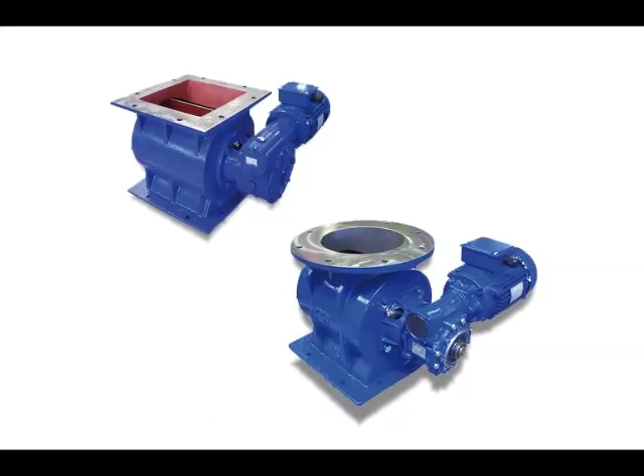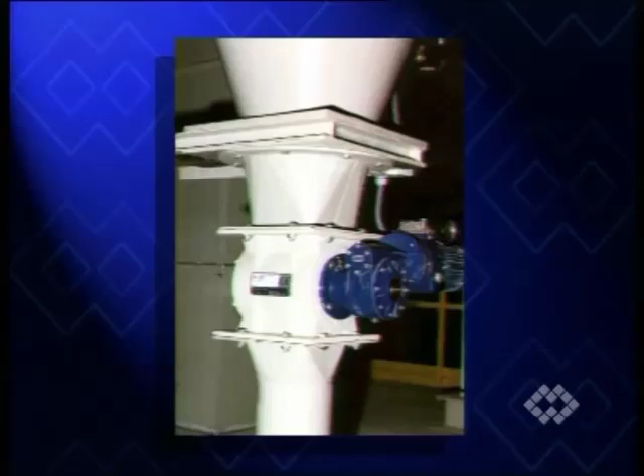Controlled feeding from or into silos and hoppers in a very confined space is required, rotary valves are the ideal solution. The sealing of negative pressure cyclone and dust filter outlets is the other classic application.

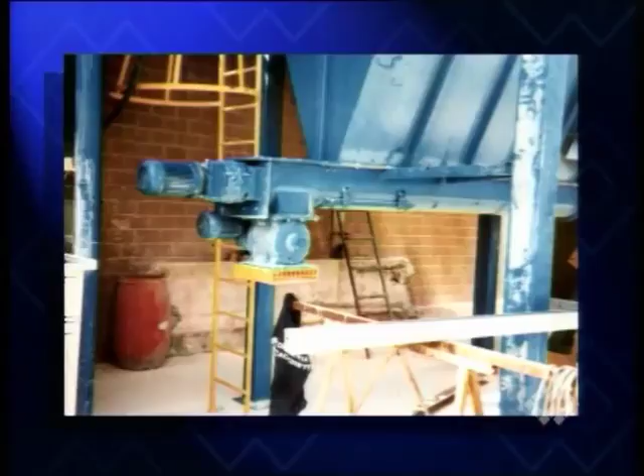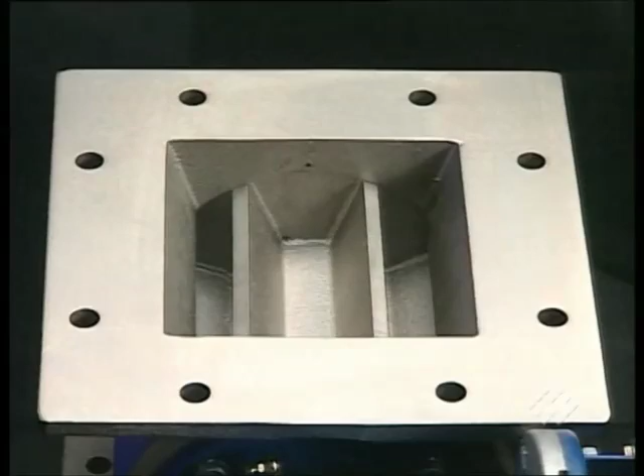Rotary valves consist of a tubular casing, a horizontally mounted rotor with a certain number of V-shaped cross-section compartments, a drive unit, and a casing cover opposite the drive end.

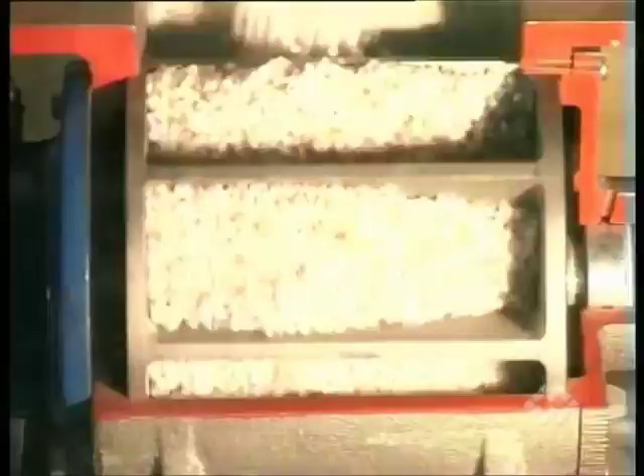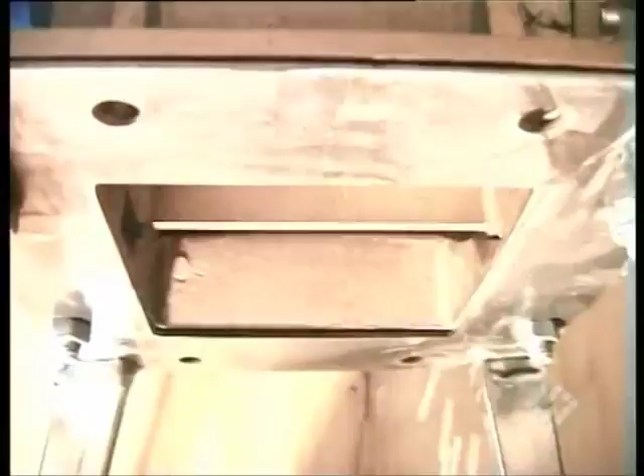Two compartments at a time of the continuously turning rotor are filled up with material through the infeed opening at the top of the rotary valve. After less than half a turn, the material falls through the outlet port with the same cross-section opposite the inlet.

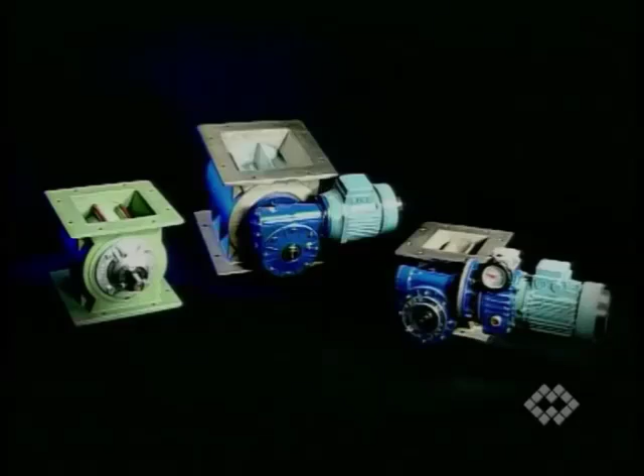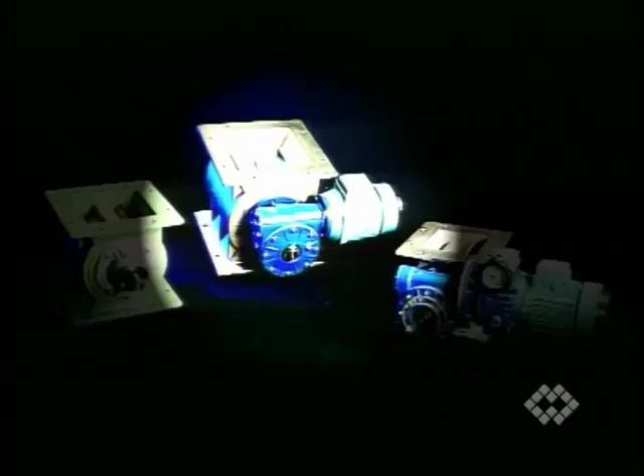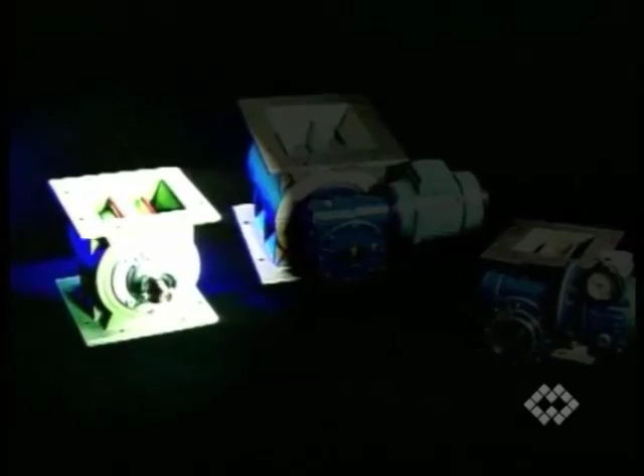Valves for corrosive products come with casings, covers and rotor made from chromium or nickel-plated cast iron. Additionally, versions with Teflon-coated contact parts and food-grade versions entirely made of stainless steel are available on request.

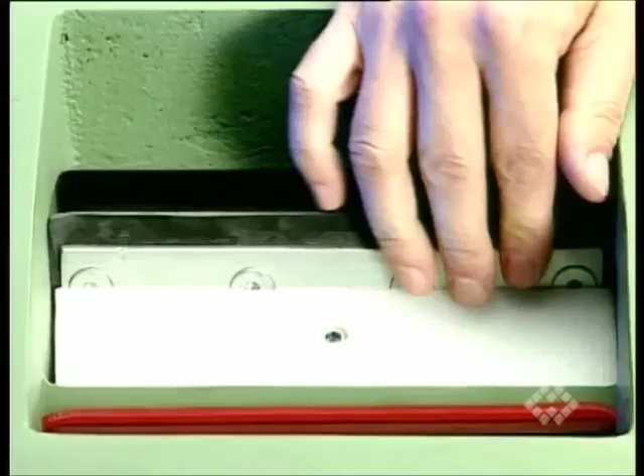According to the material handled, rotors can be equipped with removable synthetic inserts to reduce the feed rate or to handle particularly sticky materials, and with scrapers made from Vulkollan, Viton, Teflon or spring steel.

WAM Group members, Torex's rotary valve range meets every user's requirements. In the version with a standard rotor, they achieve the following feed rates.

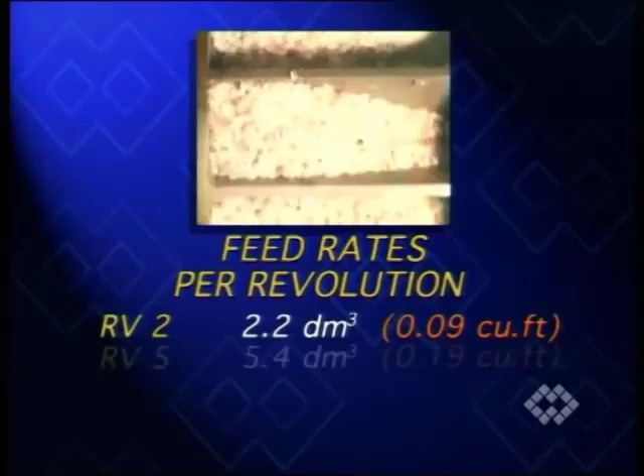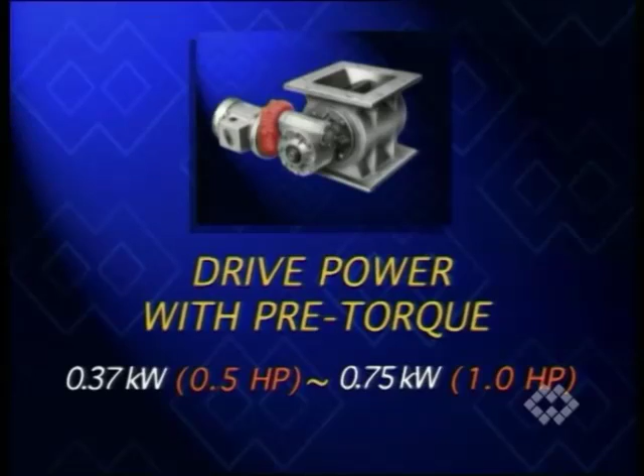With fixed direct drive, installed drive power ranges from 0.5 to 1.5 kilowatt. With pre-torque, from 0.37 to 0.75 kilowatt. And with variable speed drive, from 0.37 to 0.75 kilowatt.

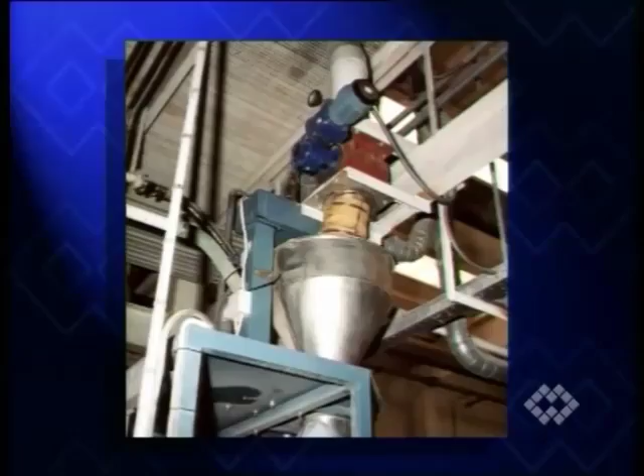In comparison with other feeding devices, RV-type rotary valves boast a few substantial advantages: space saving, sturdy, various materials and treatments available according to product handled.

Direct mounted drive without coupling, inlet and outlet flanges to WAM standards, scrapers made from different materials to improve sealing properties, compartment inserts for sticky materials or feed rate reduction, air purge shaft seals at both ends.

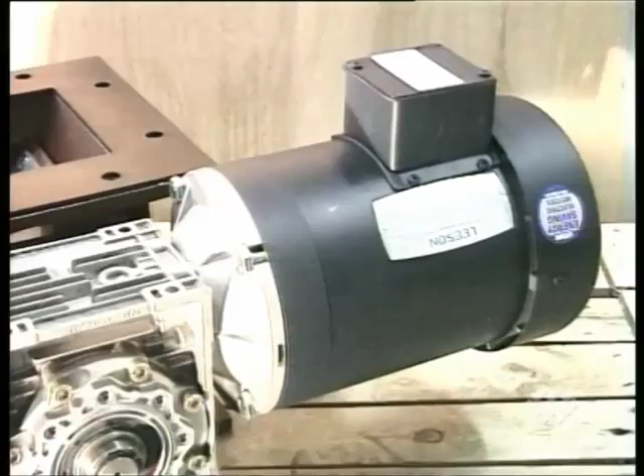Rotation sensors, electric motors according to NEMA standards, forced ventilation motors for cycle inverter control.

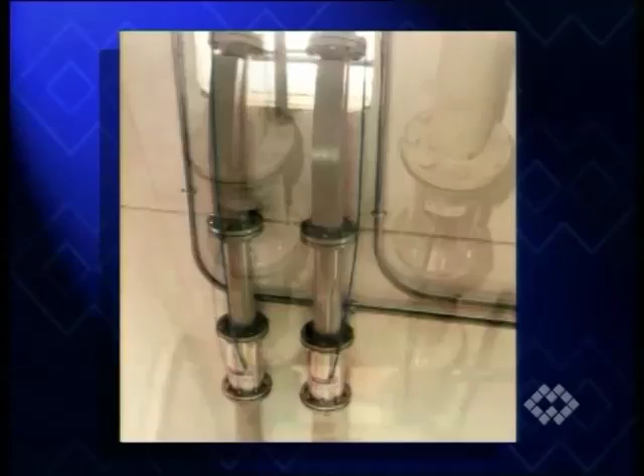The M-type pinch valves are used to intercept material flow in pneumatic conveying or other pipes. In addition, they are installed as a locking device for silo filling pipes.

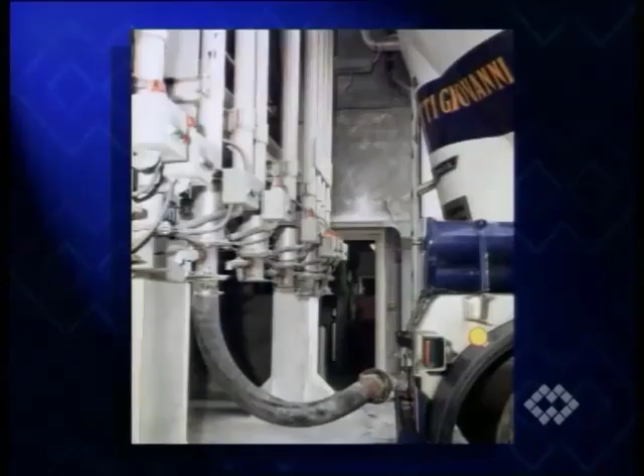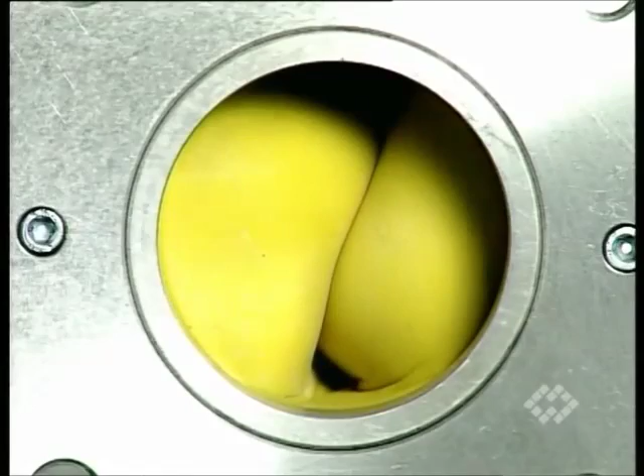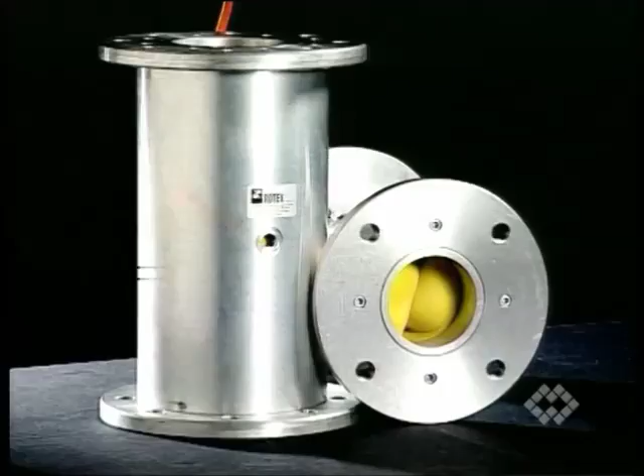In the open position, the internal cross-section of the valve is identical with the connecting pipe diameter. By introducing compressed air, or especially with small valves, water under pressure through the threaded bore into the valve, the internal flexible sleeve is reshaped in such a way that the passage is hermetically sealed.

Totex's pinch valves equally handle pneumatically conveyed powders, granules, fibers, dense mixtures and liquids.

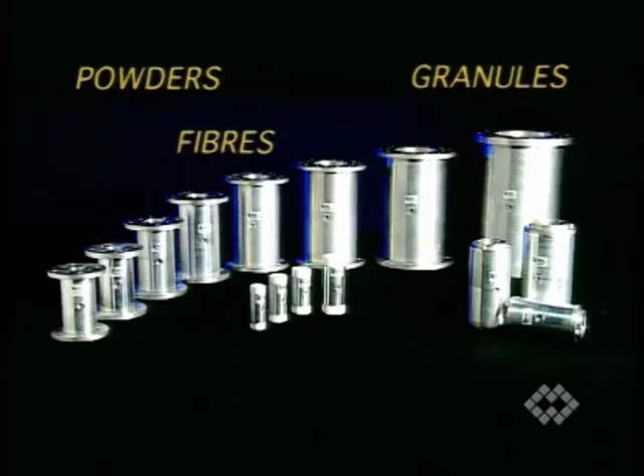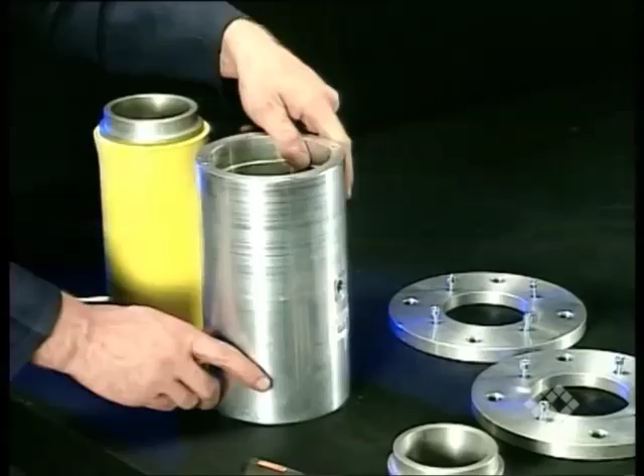The valve body of each model is made of aluminium alloy. Sleeves are made of various types of fabric-reinforced materials according to the product handled. The sleeve support bushes are either made from carbonitrided alloy steel or from stainless steel 304 or 316.

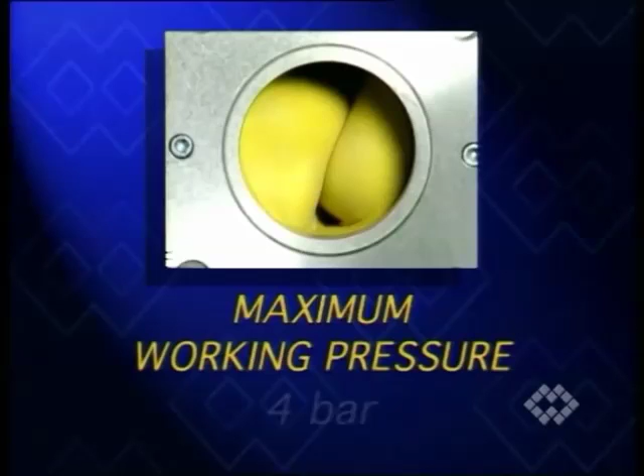While maximum working pressure must not be greater than 4 bar, maximum inflation pressure is 6 bar. As a result, the maximum pressure differential according to the type of sleeve is 2 bar.

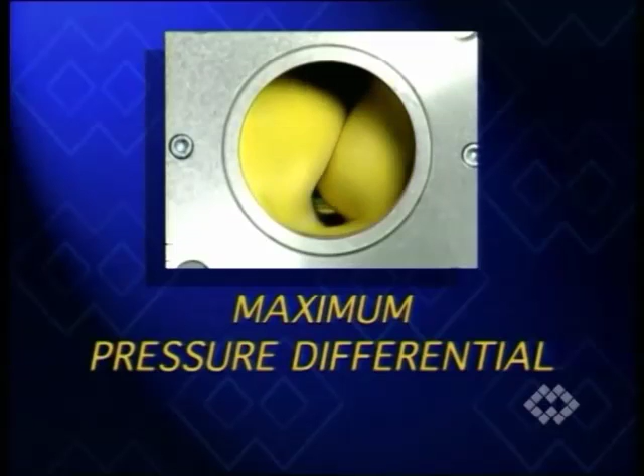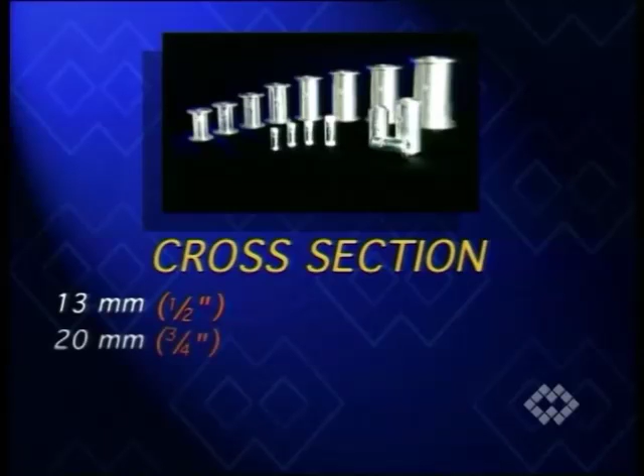The VM valve range stands out due to a variety of sizes. The internal cross-section ranges from a minimum of 13 to a maximum of 200 millimeters.

The most significant applications of VM-type pinch valves are all kinds of bulk materials that can be handled by pneumatic conveying systems, chocolate powder and hazelnuts in the food industry, paints and fertilizers in the chemical industry, effluents and lime milk in wastewater treatment plants.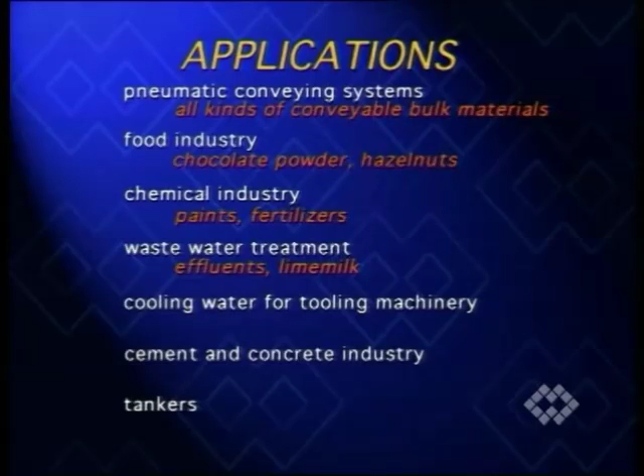Alkali and pastes for cooling water of tooling machinery, sand, gravel and plaster in the cement and concrete industry, as well as for cement, flour or animal feed transported in tankers.

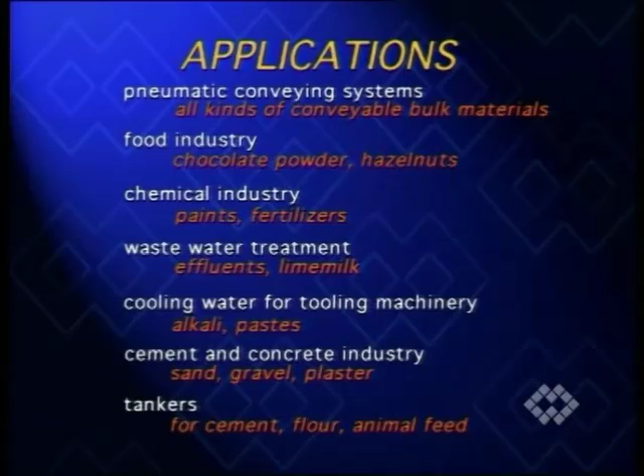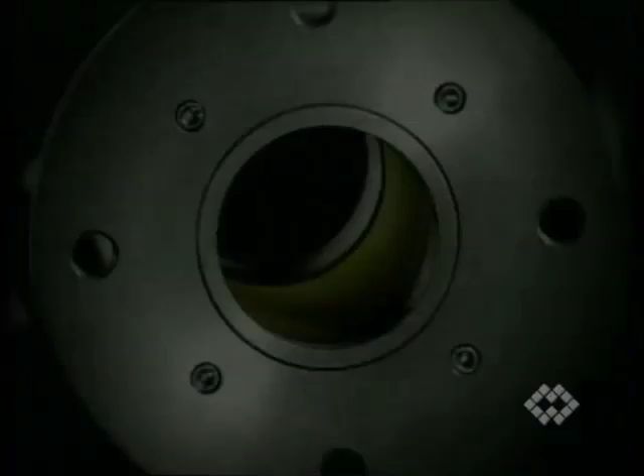VM-type pinch valves offer the following advantages: full bore through passage without any pressure loss, suitable for systems and plants requiring explosion-proof line closure.

No product contact with the body, apart from periodic replacement of the sleeve with certain products handled.

No maintenance required, low weight in comparison with other makes and other valves, particularly low air consumption.

Sleeve material suitable for the product handled, different connection systems, and different bushes applicable for different products handled.

The fact that the valves are mass-produced guarantees an outstanding price-performance ratio.

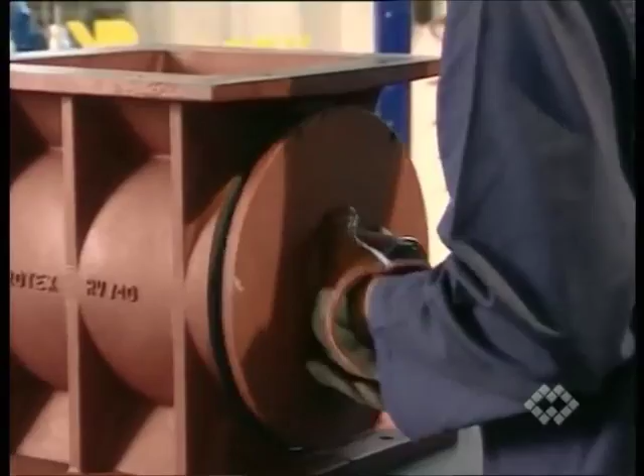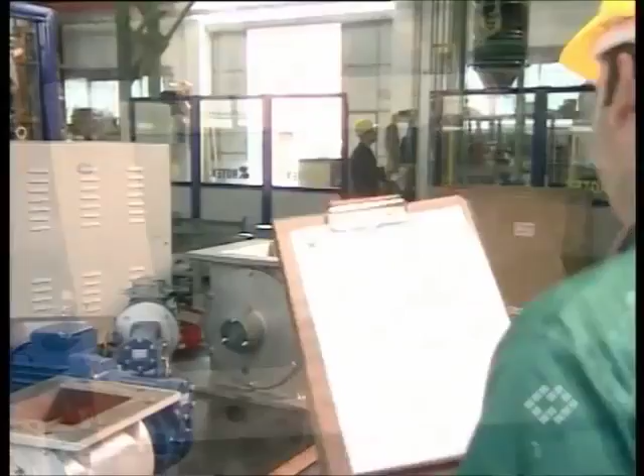A quality dedicated production layout gives the client the assurance that the equipment he is going to use has been checked and tested in each phase of the manufacturing process up to the shipping department.

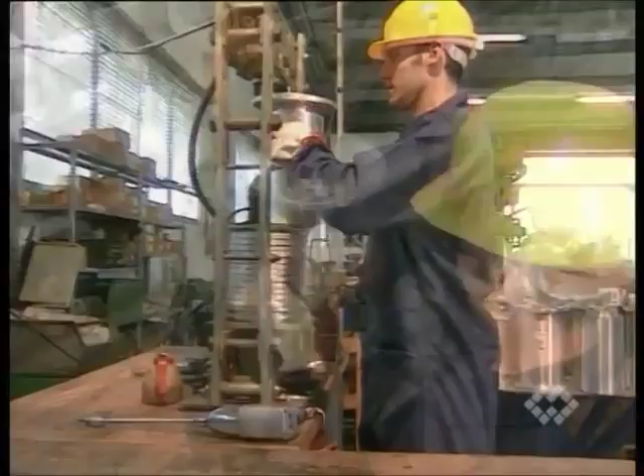Quick delivery is guaranteed thanks to a large amount of stock of components and parts at the factory in Italy and at the WAM Group subsidiaries worldwide.

During the following part of this video, please pay attention to the special safety notices.

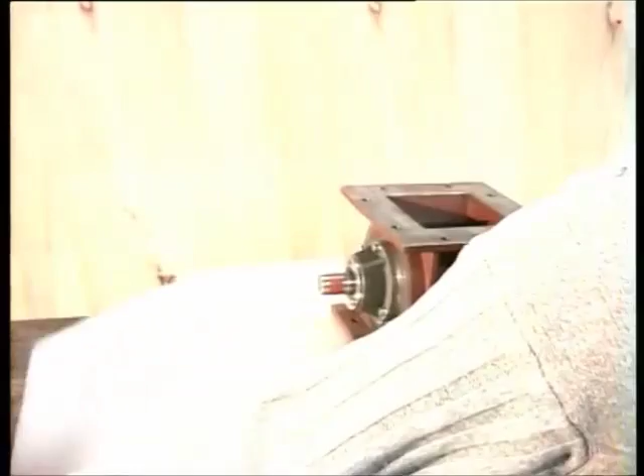On receipt of the consignment, check that the goods are in conformity with the invoice and with the acknowledgement of order. Handle all material with care. Remove the equipment and its accessories from the packaging, and from now on follow the supplied instruction manual for handling, assembly and installation.

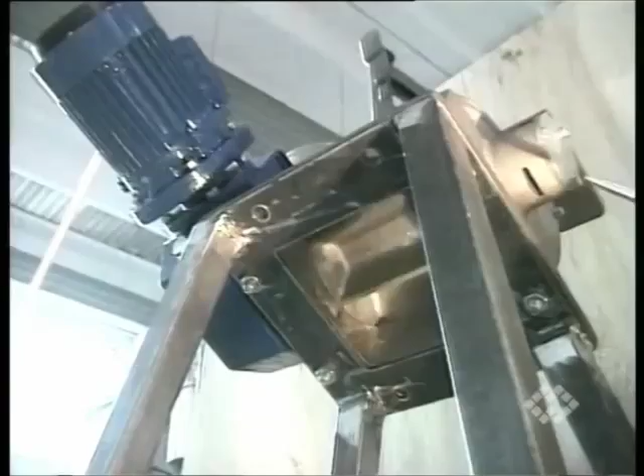RV valves are supplied fully assembled. Ensure the inlet flange and, if necessary, also the outlet flange are firmly bolted to their connecting flanges. Also ensure that the gap in the casing cover points downwards.

Before starting the rotary valve, please remember the following notices. Never put your hands inside the rotary valve while it's running. If the valve outlet is free, provide for a protection that impedes access to the moving parts.

The electrical connection with the main supply must be carried out by qualified personnel only.

Before any kind of repair or maintenance work, disconnect the electric motor from the mains. Before electrical connection, ensure the electric motor plate data and the voltage supply match. Follow general safety instructions.

Check if foreign substances or water have entered the valve. If so, clean it. There should be no clearly perceptible friction between the valve rotor and the casing. Adjust scrapers, if supplied, for better sealing.

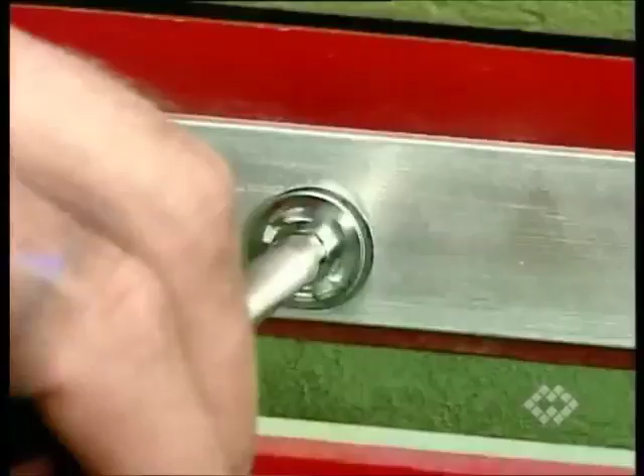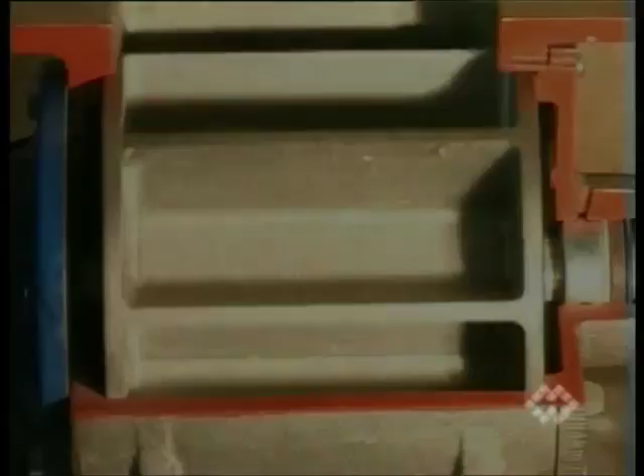Before adding material, start the empty valve and make sure it runs smoothly. Only then add material and proceed with regular operation.

The RV rotary valve cannot function in a standalone capacity. It is therefore prohibited to place it into service until the plant in which it is installed has been globally declared to conform with the requirements of the European General Safety Directive for machines.

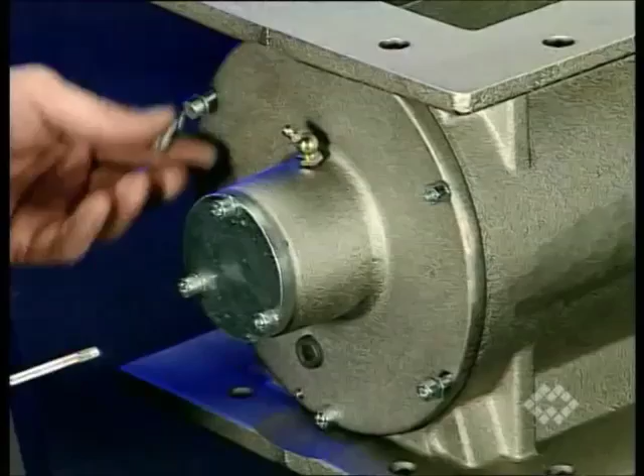Remove the shaft sealing unit as shown in the following sequence.

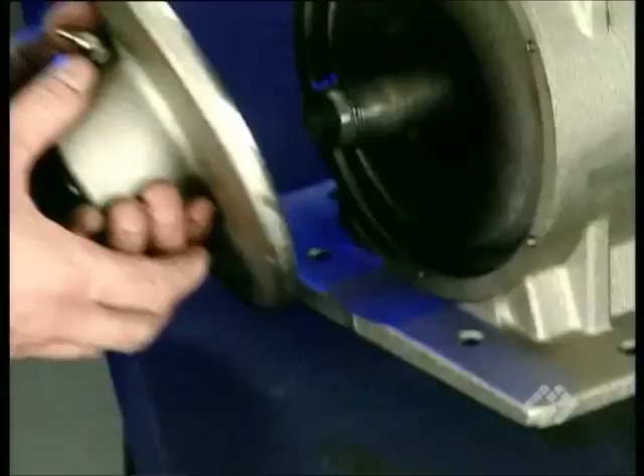Remove and reassemble the rotor as shown in the following sequence.

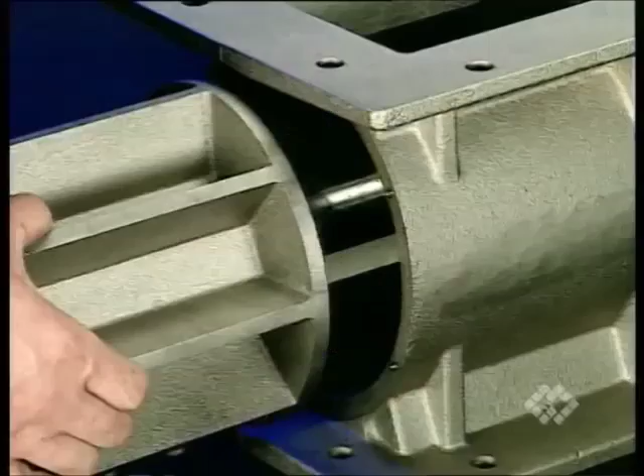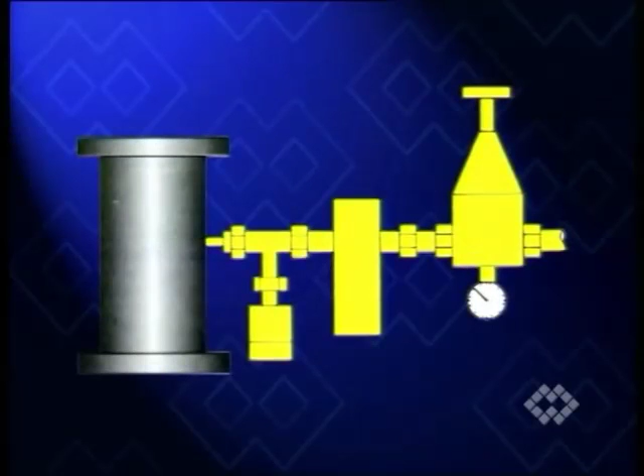VM valves are supplied fully assembled. Ensure the inlet flange and, if necessary, also the outlet flange are firmly bolted to their connecting flanges. Ensure the control system is correctly set and connections are firmly fitted.

Before starting the pinch valve, please remember the following notices. Never put your hands inside the pinch valve while it's working.

If the valve outlet is free, provide for protection or clear warning signs. Do not expose parts of your body to the compressed air jet.

Follow general safety instructions. Check if foreign substances have entered the valve. If so, clean it. Before adding material, start the empty valve and make sure it works smoothly. Only then add material and proceed with regular operation.

The VM pinch valve cannot function in a standalone capacity. It is therefore prohibited to place it into service until the plant in which it is installed has been globally declared to conform with the requirements of the European General Safety Directive for machines.

Remove the support bushes as shown in the following sequence.